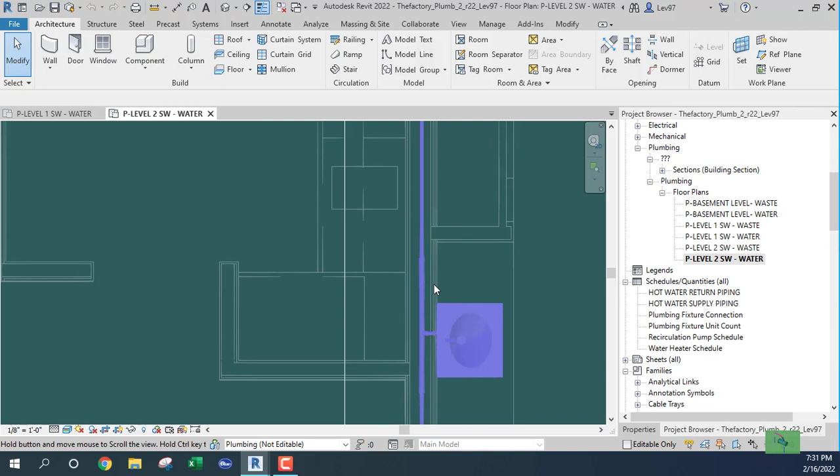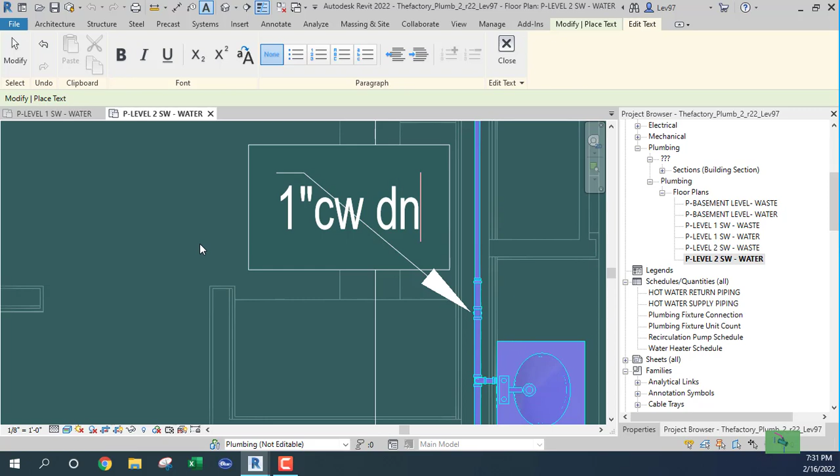Okay, so I think I left off with the cold water going up, from the first level up to the second level. I think I need to put a note here, say 1 inch down. I'll go here and let's say 1 inch cold water down. Okay, so that will take care of that.

Okay, so let's go back to the first level, and now what we need to do is, let me look at my notes here. Let me pause it. Okay, so let's look at this again. So I found my notes.

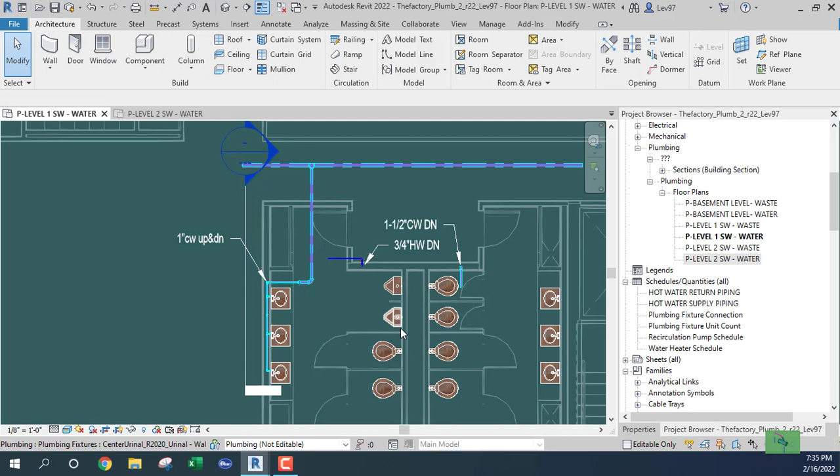So what I need to do is, for the rest of my plumbing fixtures, I'm going to need to supply cold water to these fixtures, right?

Ooh, I don't like that fitting. I'm going to change that. I'm going to make another elbow. Yeah, I think it might be better to come down, because that looks like a bit of a bull head fitting. If you come down, this is more a fluid type of fitting, so it's more fluid going this way. So anyway, I'm gonna break this up.

So what size? 2 1/2 inch, and I'm gonna need to do another calculation. Let me pause.

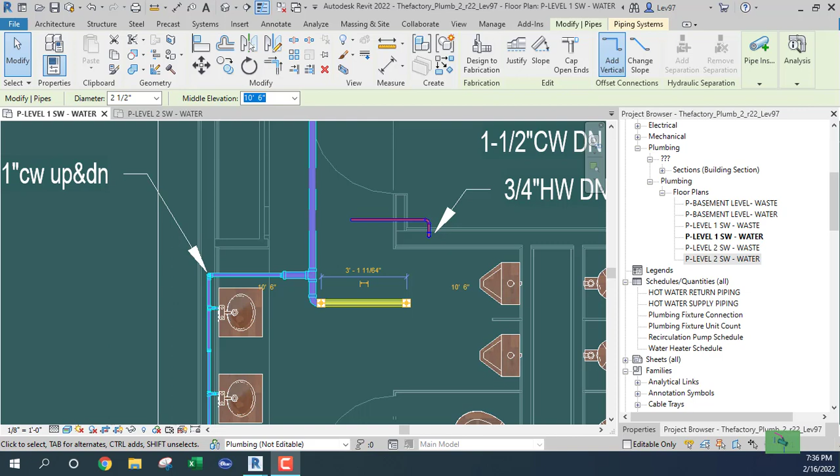Okay, so let's do another calculation. Including the second level, there's 4. Let's do the lavatories first. There's 6, including the second level, because on the first level is a copy of the second level, other than the lavatory that's out here on the second level - this guy. So let's go back. Otherwise, everything is identical. So we have 6 lavs.

Wall hung urinal, 4, and 12 water closets. So that's 141 water supply fixture units. Okay, so let me pause again.

Okay, so this is what I'm looking at - a spreadsheet where everything has been calculated in terms of the fixture units. So now I am looking in a book for conversion of GPM to the size based on Hunter's curve. So 141, that's 79 GPM.

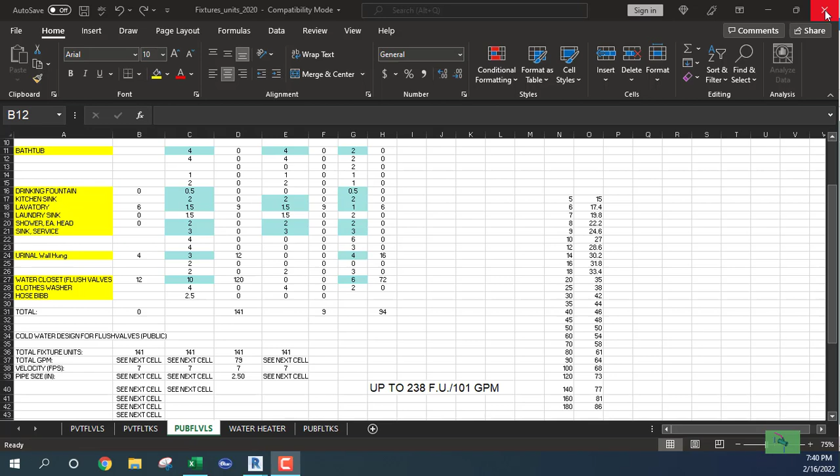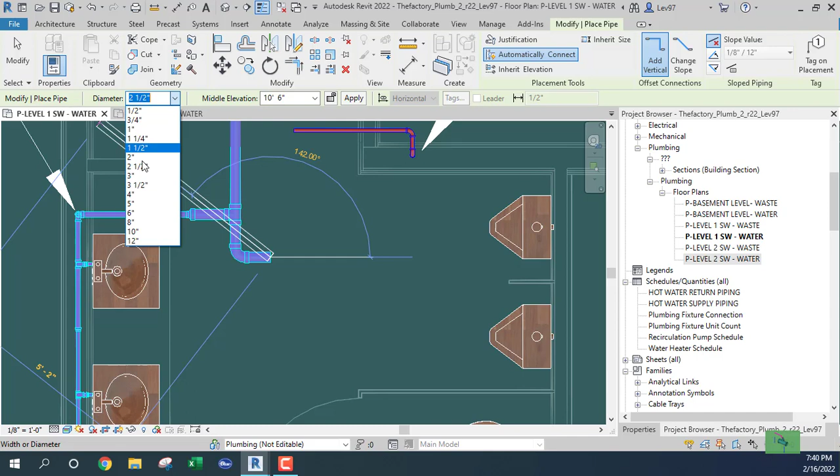Okay, what size? That should be 2.5, right? So let's break that down. So it's 2.5. Let's put a fitting in here for a 2 inch. Yeah okay, it could be a 2.5, but I'm gonna leave it.

And we are going to come all the way across. Okay, I'm gonna go across, and for my - okay, I'm not gonna put it here.

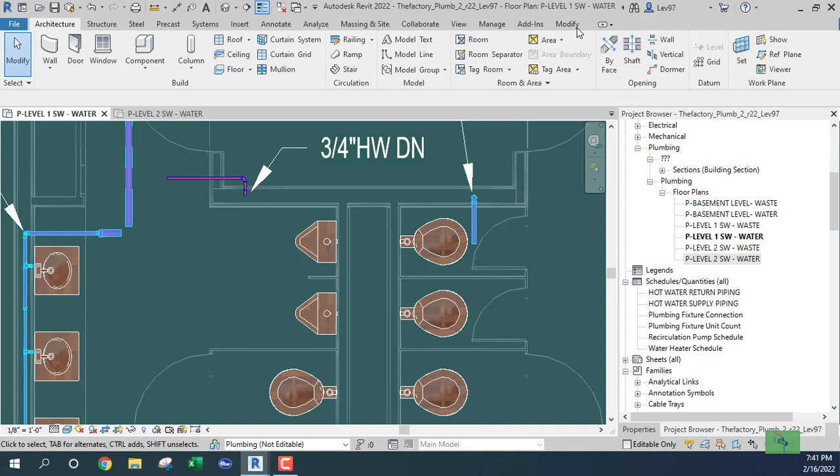I'm gonna tab so I can select all of them, and let's do this. I'm going to erase this, put an elbow in here, modify here. Okay, I think I'm going to come off here. Create similar. I think, am I going to fit that in there?

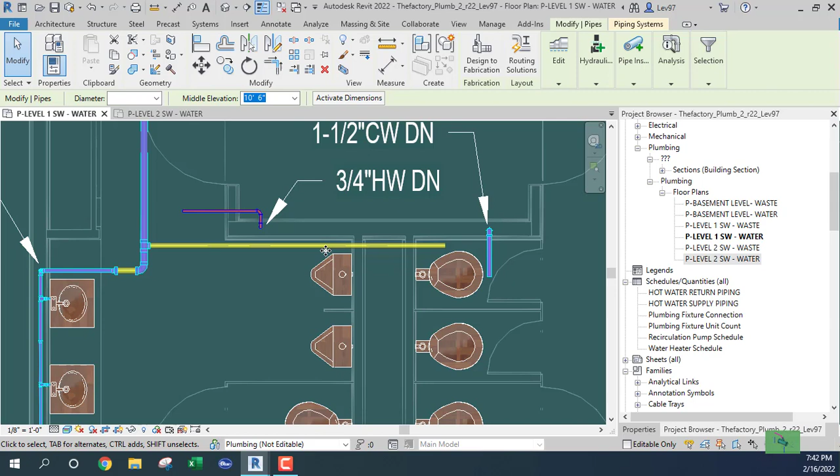And make that a 2 inch. Yeah, okay, so this is what happens, and I think I can bring this guy down some along with this, so I don't know. I think I need to fit it outside, going inside of this wall, so bring it down. That's good, I'll leave it like that. Let me bring it down just a little bit. I'll leave it like that.

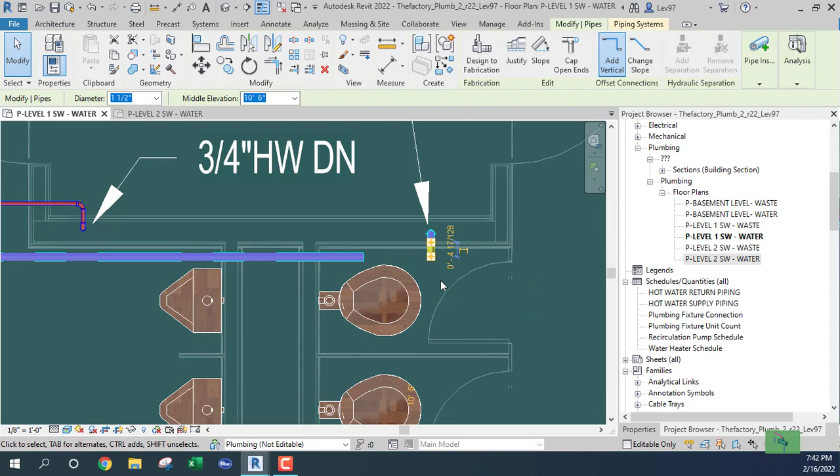Okay, and so now we start to - that is a 1 1/2 inch cold water going down. Okay, so that's where that comes from. I'm going to bring this guy up to there. But now what we need to do is start to connect all of these.

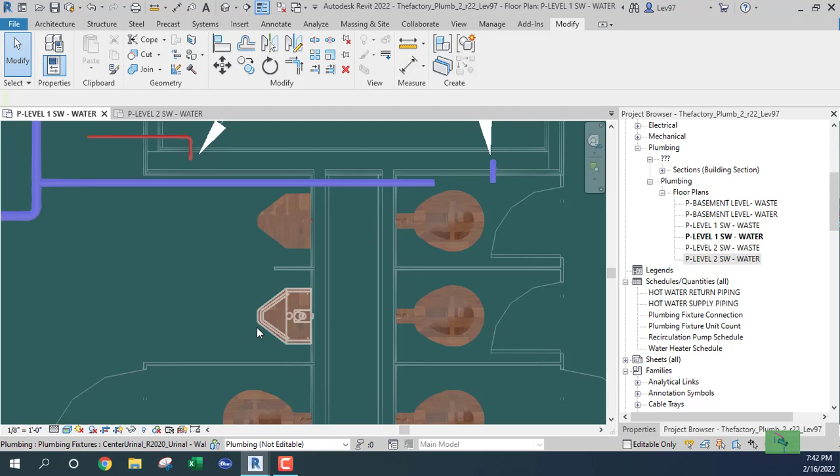4 urinals, well, 12 and 4, including the water closet. And on the urinal, let's see, I think there's 1, 2. Now, this has to be...

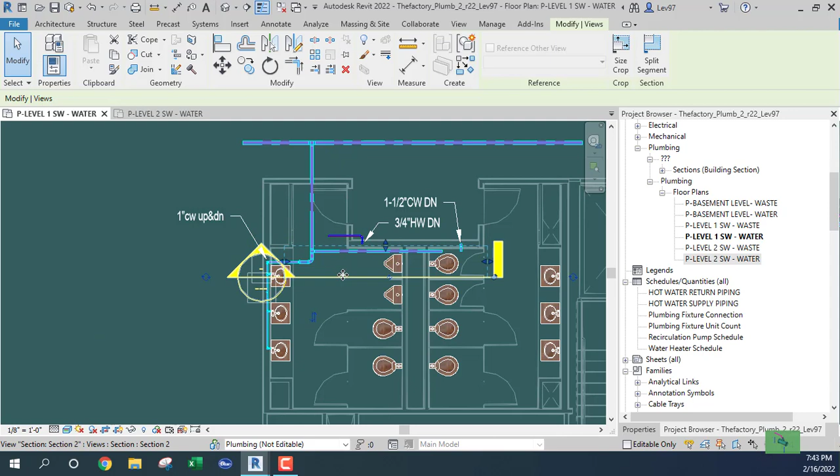Okay, let's look at a section view here, guys. Okay, let's rotate that 90 degrees. I just want to make sure that I'm getting the right connection. Right click and go to that view. Let's see, where are we? I'm on the first level.

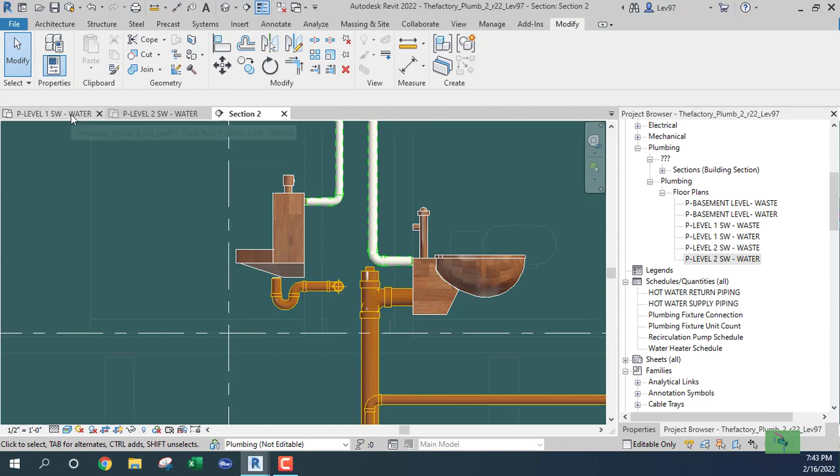Okay, so it's the one on top. Okay, just checking. So we're back over here. So this is this guy. That's the waste, that's the vent. This is the cold water.

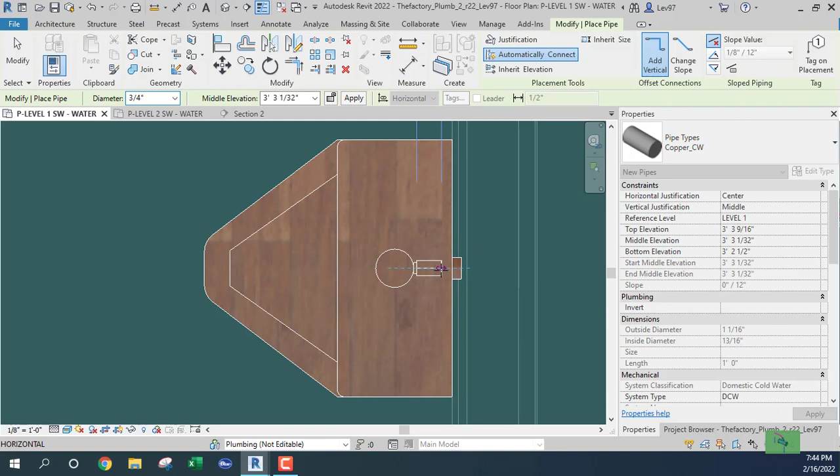Okay, and cold water, let's check our properties. And we're going to change this to cold water, 3/4 inch. Okay, let's bring it out here.

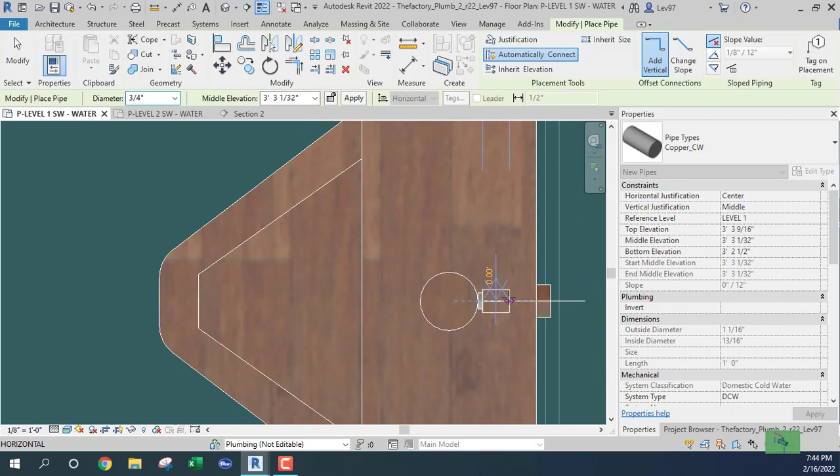Because what I want to do is connect the other urinal to the cold water. Draw cold water, make sure that type is cold water, 3/4 inch. Okay, so here, okay, so that's good. Okay, let's give it enough room and then take it back using the arrow key.

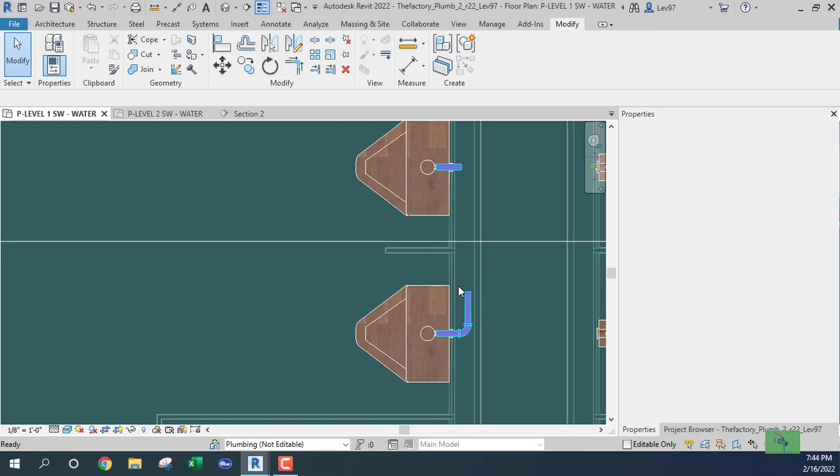And that's 3/4 inch. Do I want a 1 inch or a 3/4 inch? I'm going to leave it at 3/4 inch, and if it should be 1 inch, then it should be 1 inch. But for argument's sake with this demonstration, I'm going to leave it at 3/4 inch.

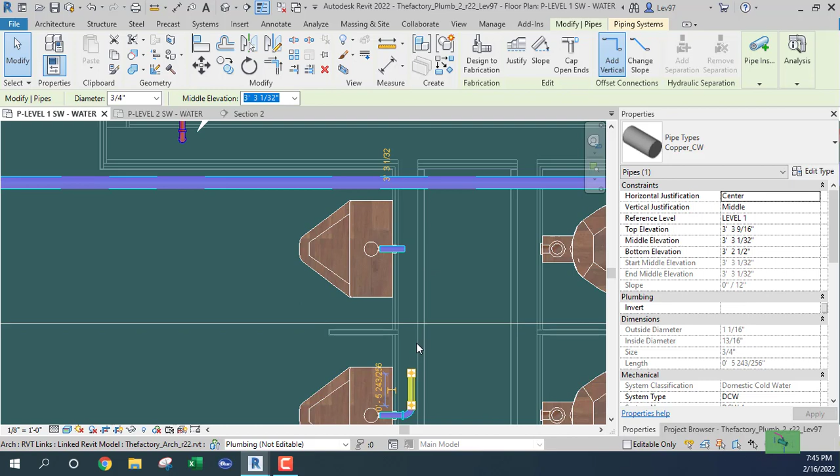So I can extend this guy to this guy, right? And then extend up here. Okay, let's look at our fixture units, make sure that it's being populated. Fixture, fixture, fixture. Okay good, we got that.

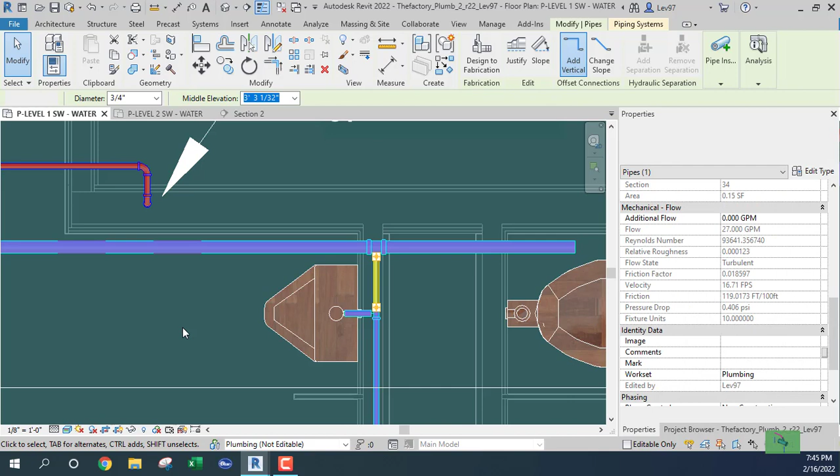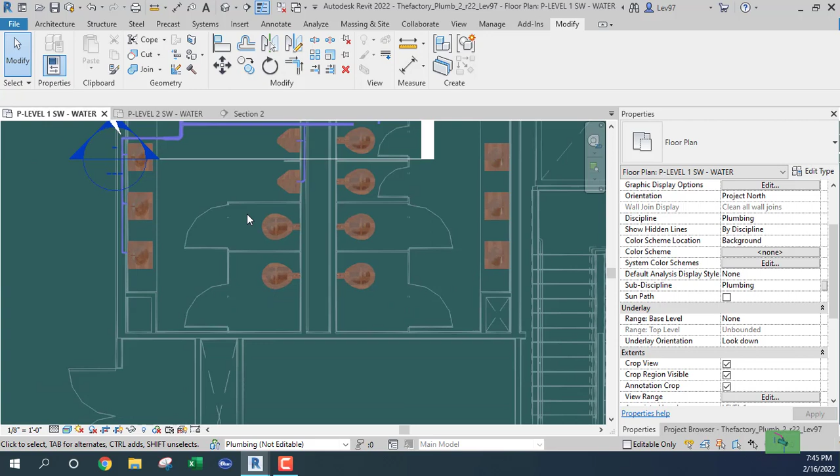Let's go back and do the same, the cold water. Let's see what we've got for the water closets. Let's see, this one could be vent, I think. Let's see what happens. Draw pipe.

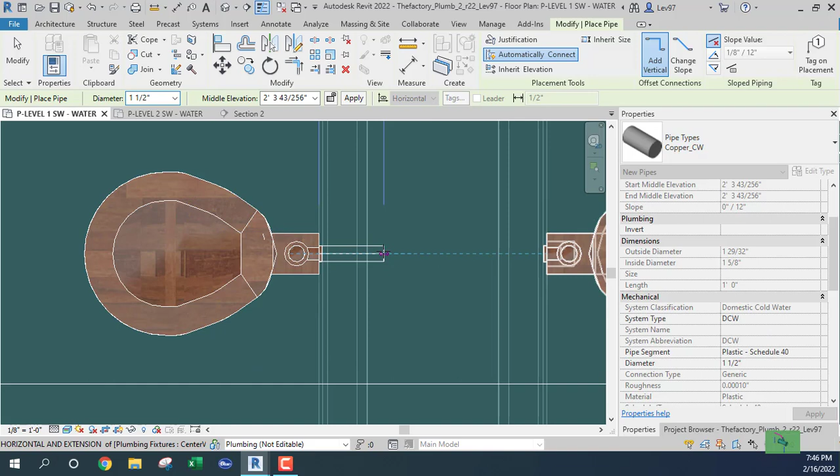What's this? If I say cold water, what's it going to give me? Cold water. So if I do this, that was on the first one, this is on this guy. Okay, so that's the vent, I think. Let me stop being lazy and just look at it. Go to the section for the water closet, and yeah, okay, so it's the one closer to the outside.

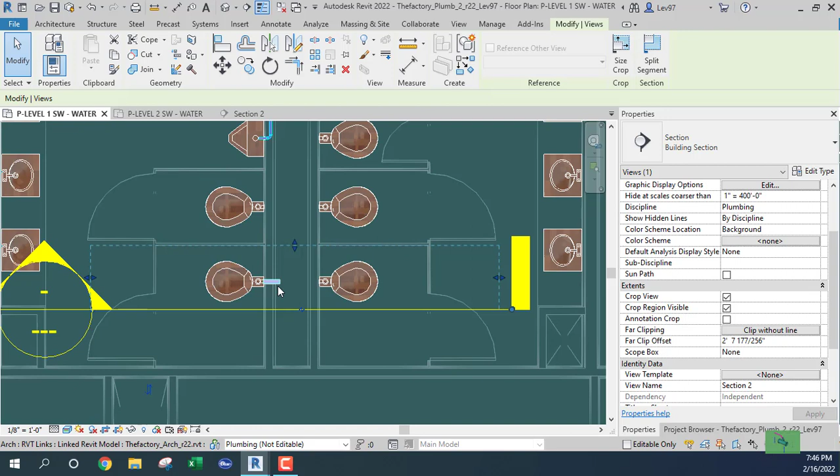Let's go back, closer to the outside. Same here. Closer to outside is this guy. Okay, nope, okay, let's change it to cold water. Why is it so big? Let's do this.

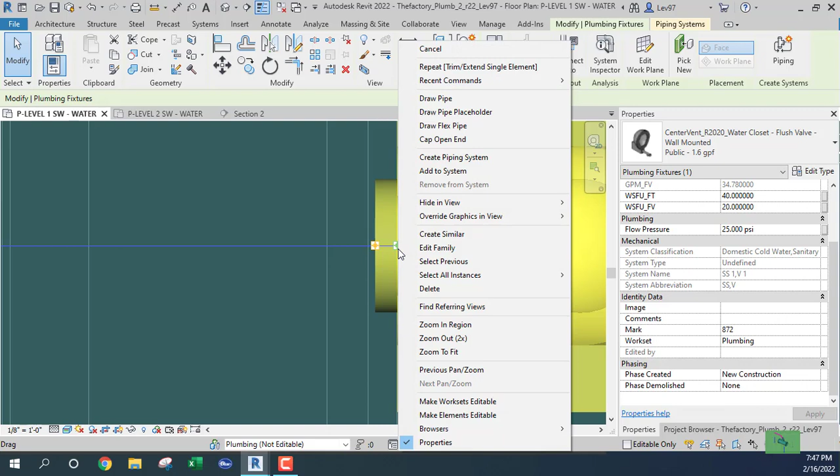Sanitary, change it to cold water. I still don't... oh, what? Is that right, 1.5 inch? Let me check my notes. I guess, so why is the other one that, a 1 1/2 inch? Okay.

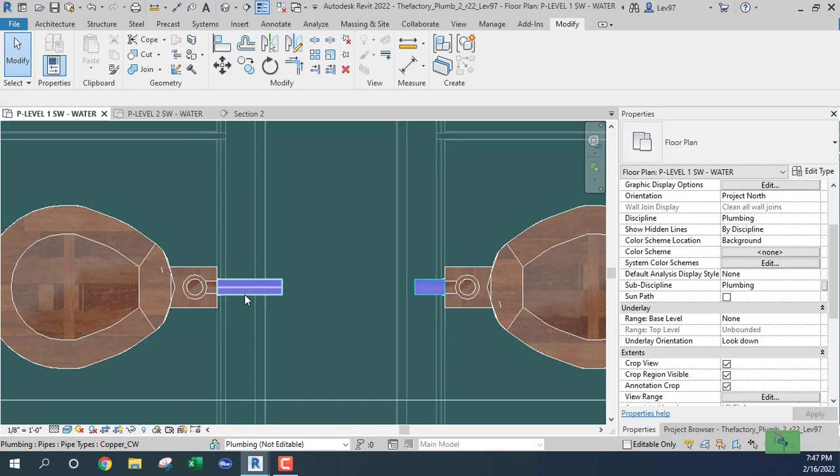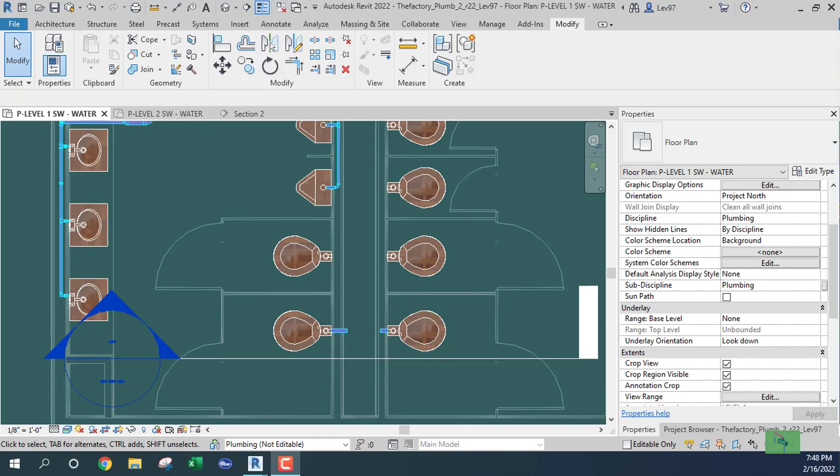So we need to hook these guys up. Okay, so let's go back, and I'm going to pause it here again. Okay, so let's do this. So this is higher, and this 2-inch pipe is higher, so what I'm going to do is connect my two back to back.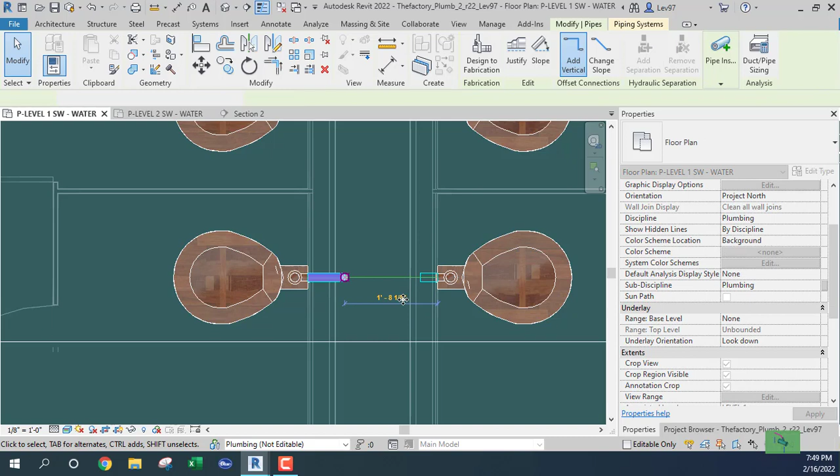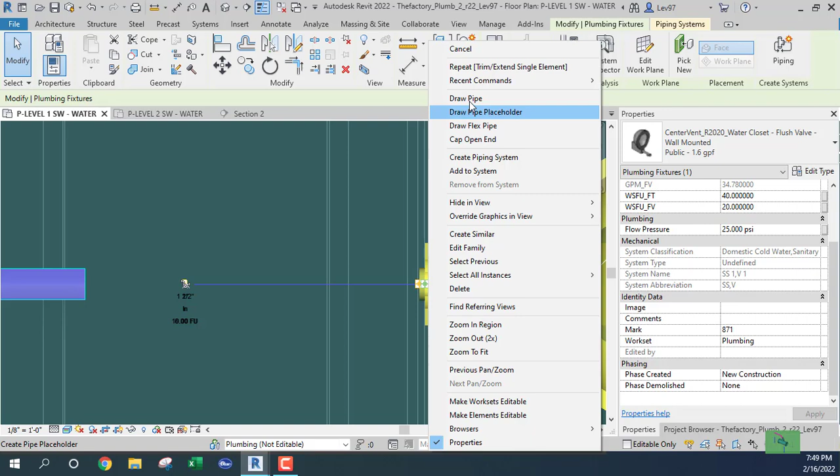Let's do this again, come out. I don't know why it continues to default to the sanitary, but I'm not going to worry about it. Go back here, and we go here. Draw a pipe, I'm going to connect into this back to back, and I'm going to come out. That's a 2-inch.

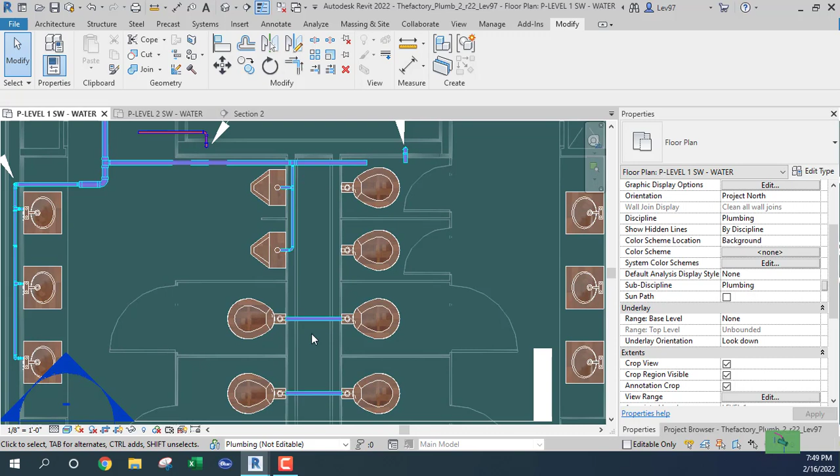Okay, so create similar there. Nope, nope, nope, I don't want that. I want to create similar here. Create similar.

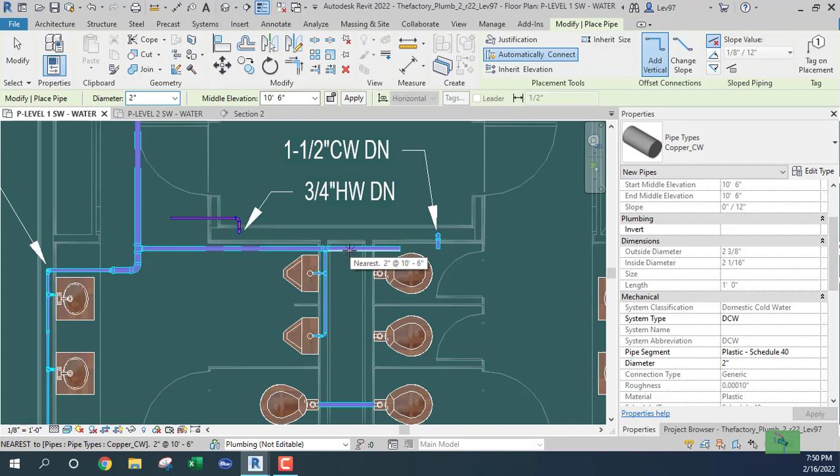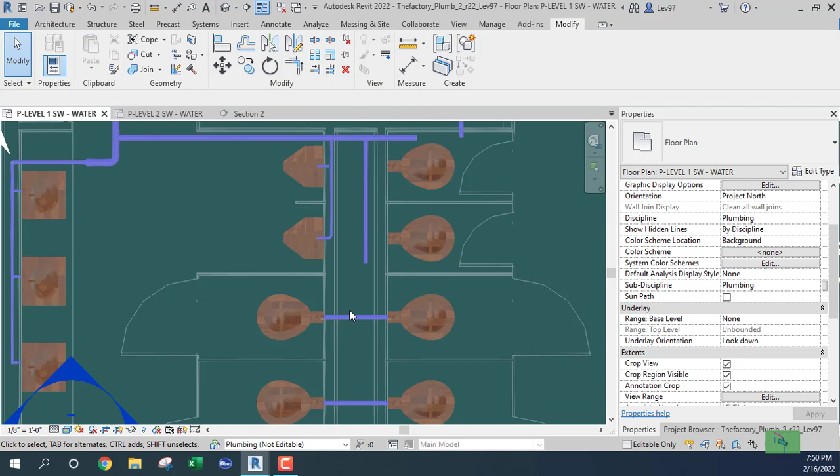So I need to go up, so I'm going to kind of put it right here. Okay, and this is a 2 inch. Yeah, let's make that 1 1/2 inch. Okay, and we're going to do this. I'm going to come all the way down. Okay, what size, 1 1/2? That's good, I like that.

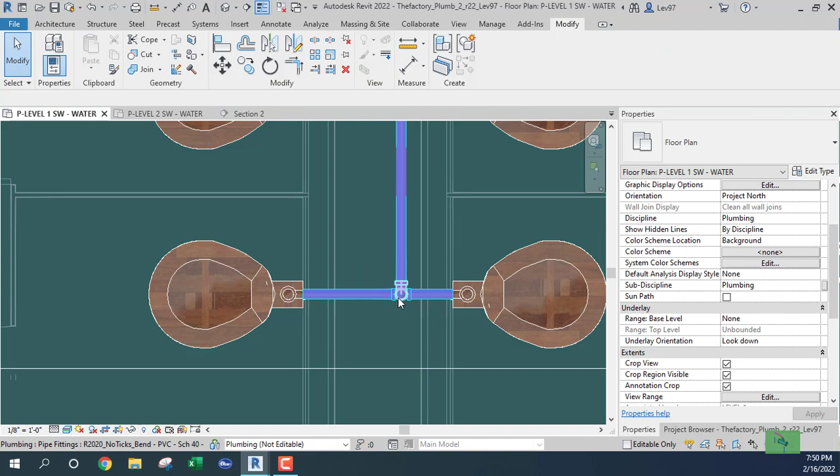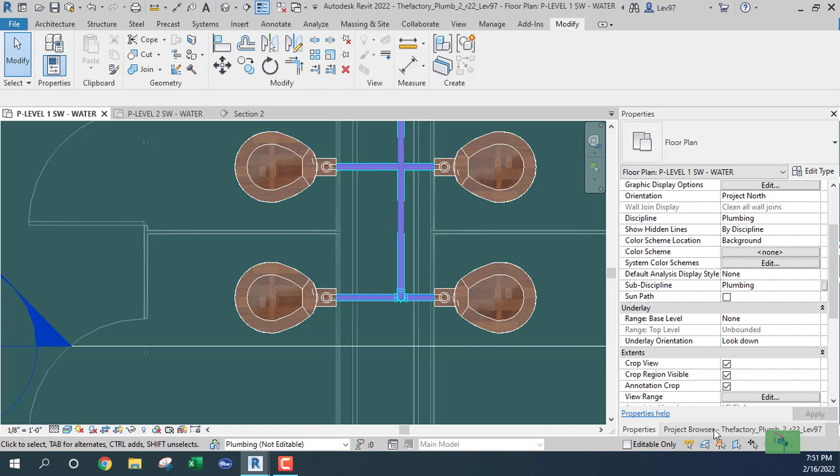Okay, and then we connect into the pipe in here. I think that what I need to do here, because I need to connect, is I need this piece. So I'm going to go back to my section, this section, okay.

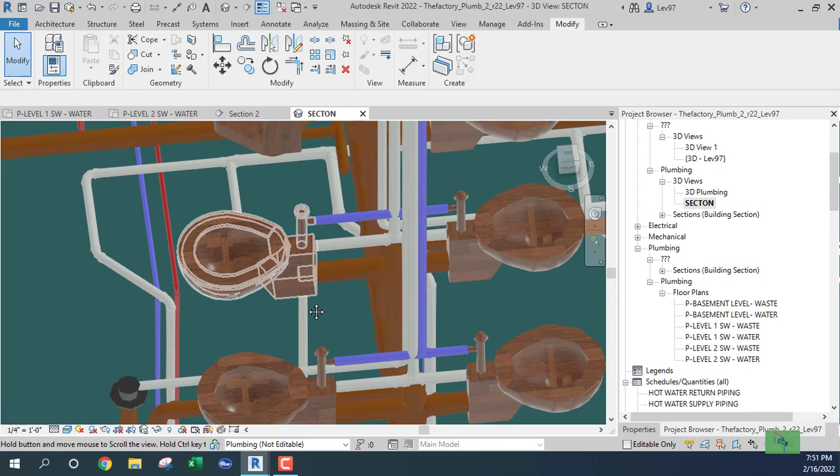That's fine. I am here. What I could do, okay, I could filter, let's filter some of this out. Let's filter out the hot water, the waste, and the vent, so we can see what we're doing. Okay, so I'm going to copy.

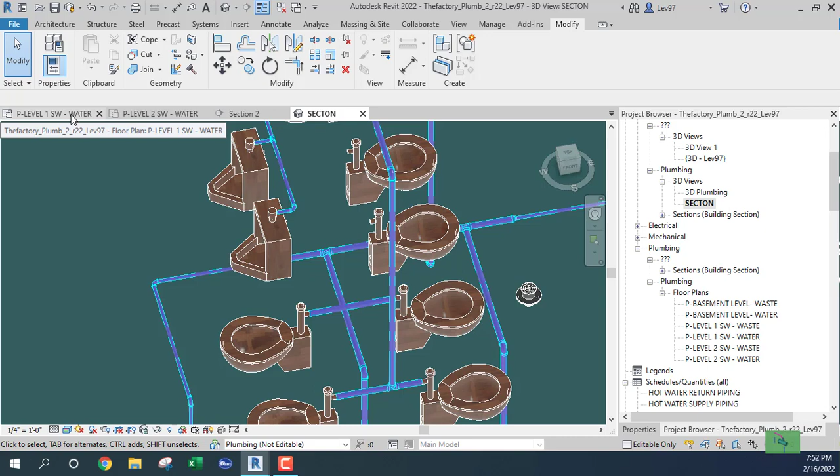We could use a section view. Let's go to section view. Yeah, let's go to section view. Let's do a section view. Section view. Let's rotate that at 90. Let's go 90.

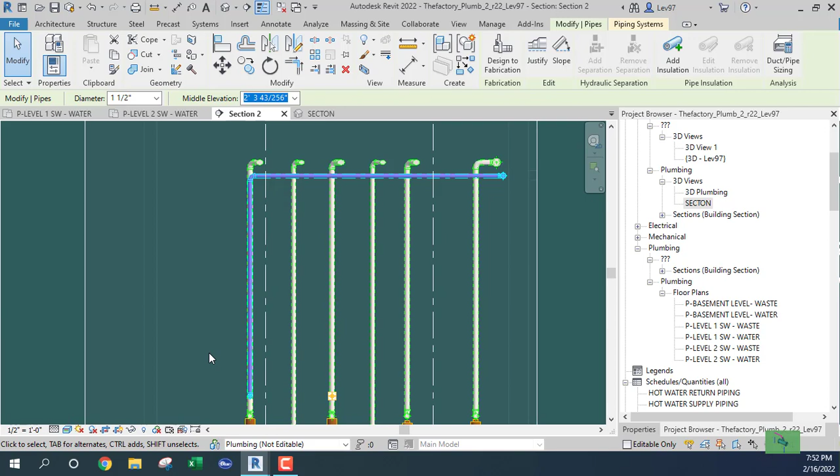And kind of go in there pretty tight. Yeah, I like that, I like that. And just get a reference to it in section 2. So that's where we are. I don't know if that's the right view. Maybe this section might be better, because I've gotten myself in a bit of a pickle.

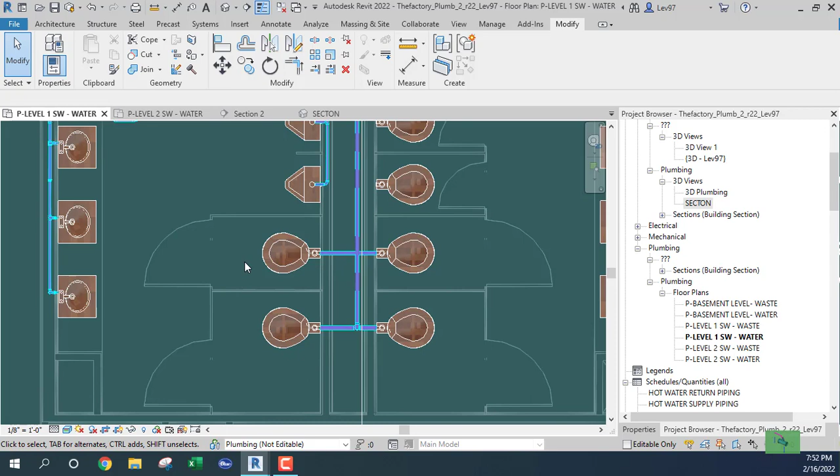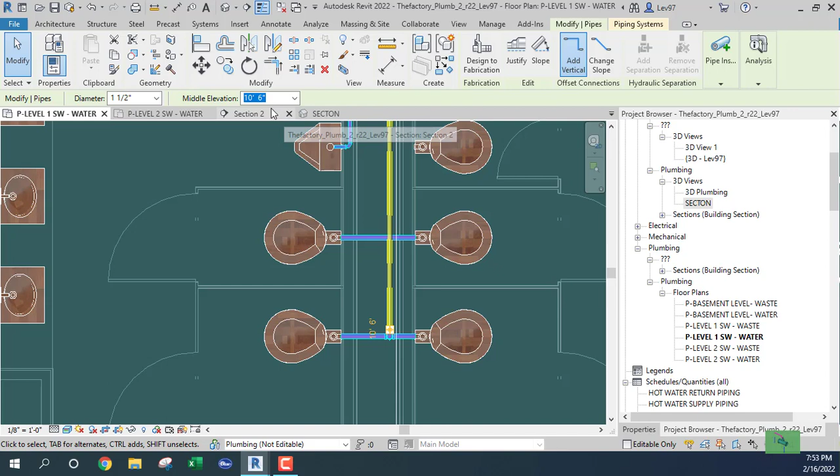What I could do is create similar here. And no, okay, I think that, let's go here. And go section. Turn off the vent, okay, let's turn off the vent. All right.

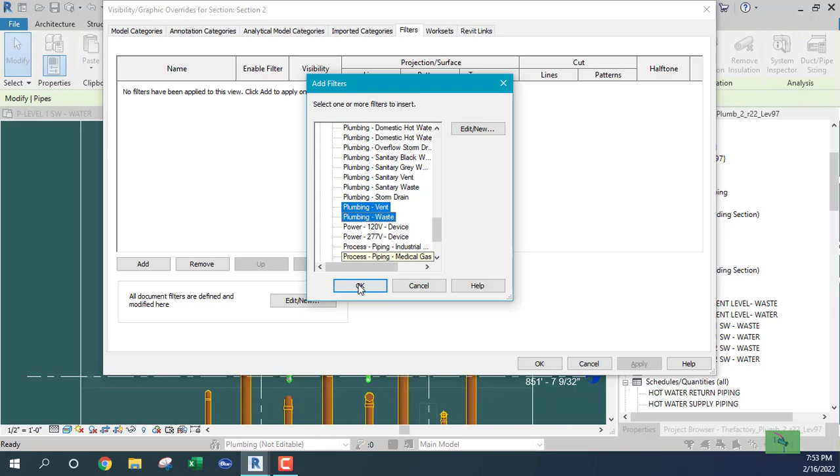Let's add some of this information so that we can filter out other information, right? Storm drain here, plumbing. Okay, let's turn off... nope. Yeah, okay, nope, okay yeah. Cold water, now.

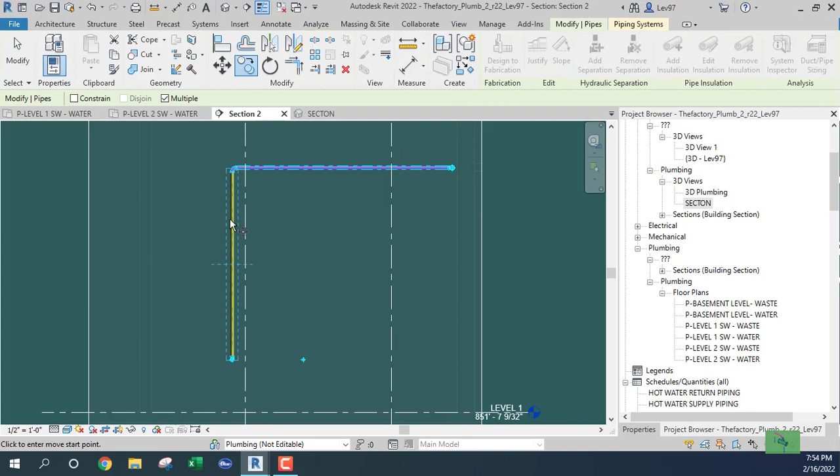Let's see, I want to create... copy. Nope, let's do this, create similar. Can I do that? Will Revit let me do that? Looks like it so far.

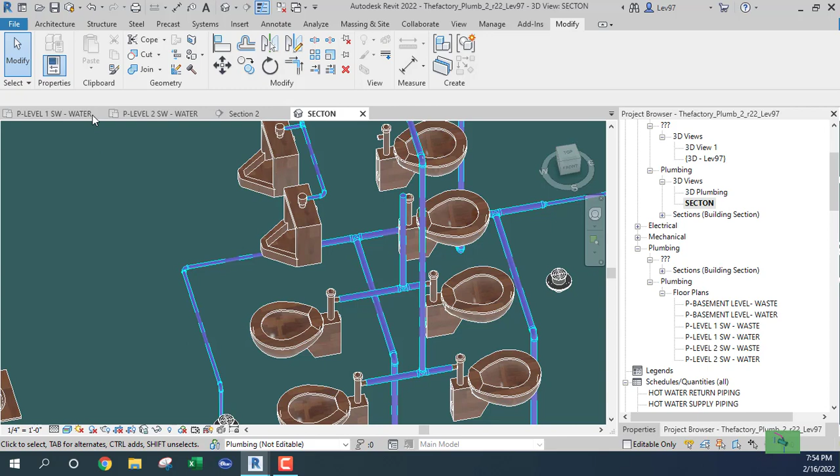Let's look at the first level. And I think what I can do is, can I line that up? If I line that up here, nope, let's go back. Let's move this guy out of the way. I think this might work. Align this pipe and that pipe. Yeah, okay.

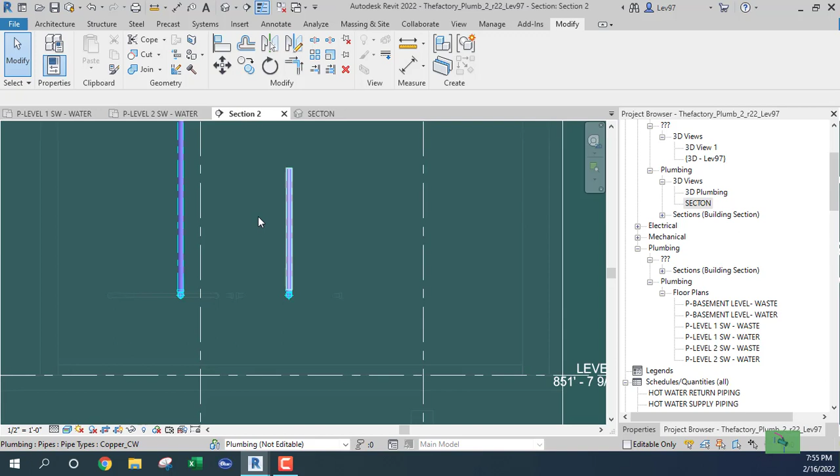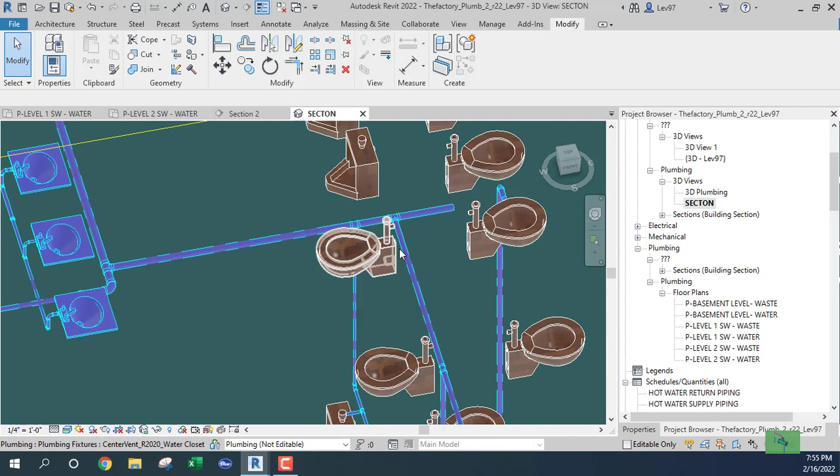That might work, section and extend. That was tough, I think it could have been done a little better. I don't like that anyway, I don't like that, the way that's laid out. I don't like that, because I think I can come down once and feed these instead of these long runs.

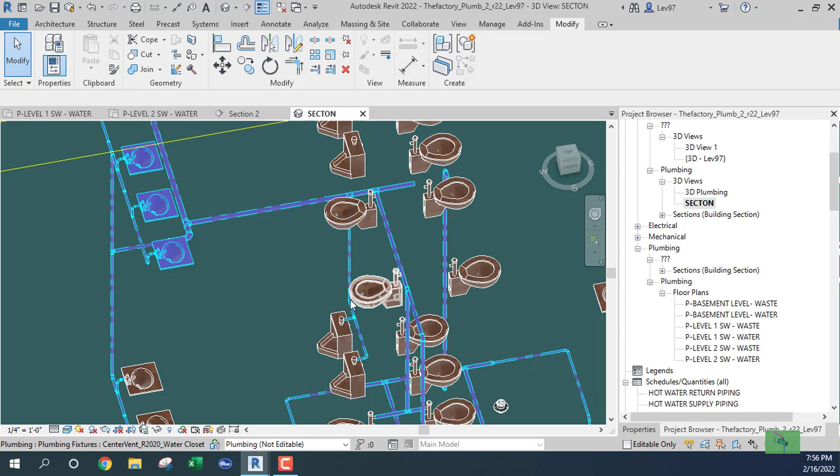Okay, so I think I'm going to leave it here. I don't like this design at all. I think I should do it like I'm doing the urinals, just come down with the main and then connect. Yeah, I think that might be better. So okay, so I think I'm going to leave it here. And I'll talk to you guys later.